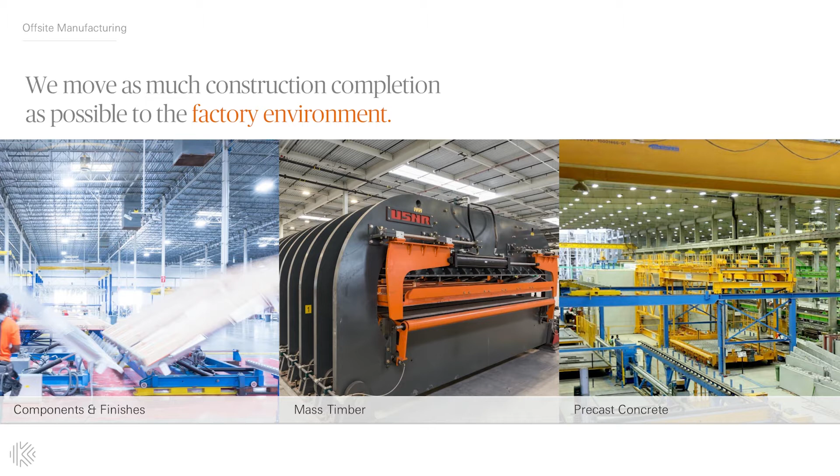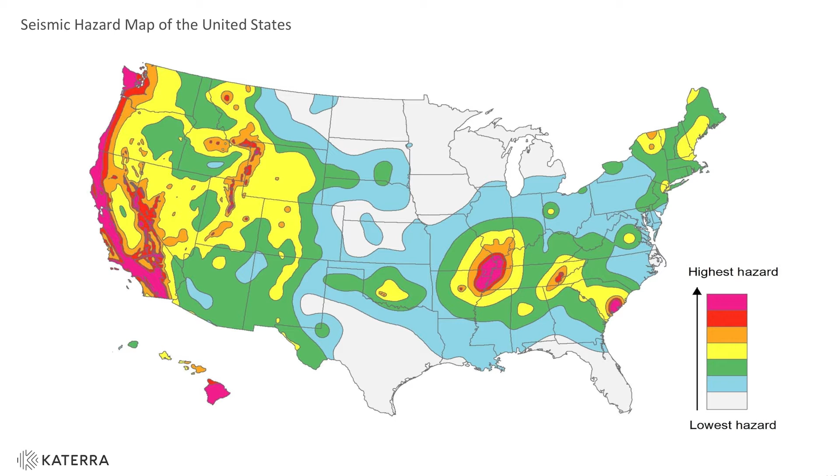For example, here we're looking at a seismic hazard map of the U.S., and using automated design, we actually estimated the cost of the structure in all of these different regions. And due to the different seismic and lateral requirements for that 24-unit, 3-story multifamily housing product that I mentioned briefly earlier, the cost of the structure more than doubles depending on where it's located in the country, due to the different structural requirements.

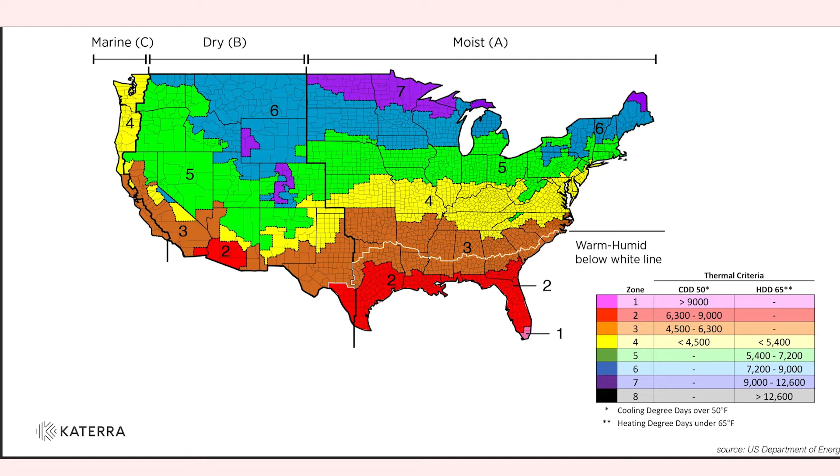We see on the mechanical system side less capital cost variation across the climate zones in the U.S. But if you're looking to optimize for operational or life cycle performance, it's equally important; we have quite significant variations in terms of operational efficiency if we're not able to customize the systems to this locality.

And finally, from a market perspective, these numbers are indicative and not accurate today, but the cost of labor in the United States for site construction is more than a 2x variance depending on where you're located in the country. I'm typically based in the Bay Area, which is one of the most expensive areas for on-site construction.

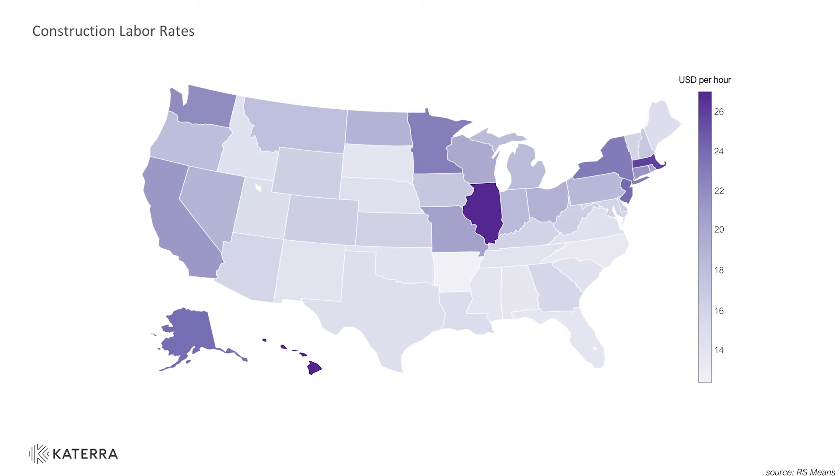And so when you're developing an industrialized solution, you want to vary the level of completion or the amount of work that you do in the factory by region. And so the solution has to be customized to allow you to do more or less work in the factory depending on the local labor economics. So Katerra is approaching that through an automated design approach, which I'll cover briefly.

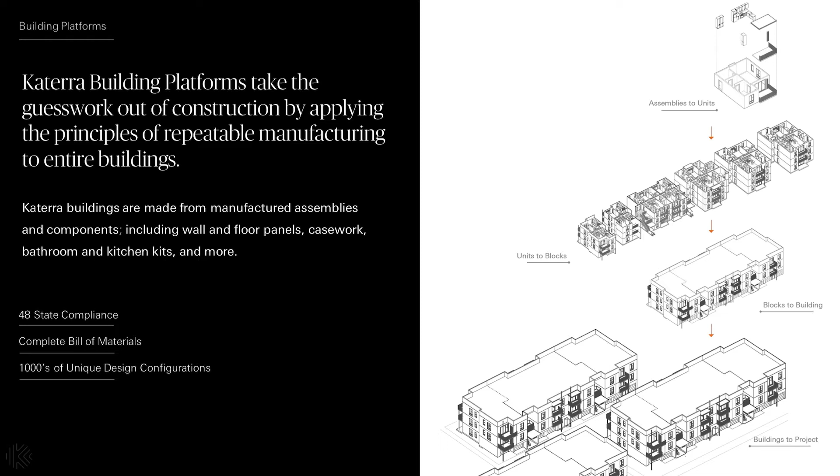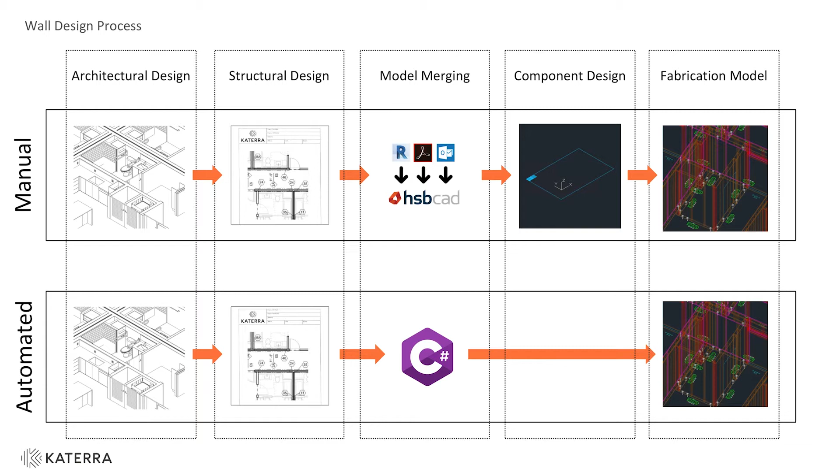So, of course, like many other designers, this is the 24-unit apartment building that I mentioned. We have standardized units that can be combined in different ways. In this case, we have 12 different standard units that are combined into these 3 building blocks of the apartment building that we call chassis, the center core block and right and left ends. And with a relatively small standard number of units, we can achieve many thousands of different variations of the building types to meet different customer criteria using a relatively standard component.

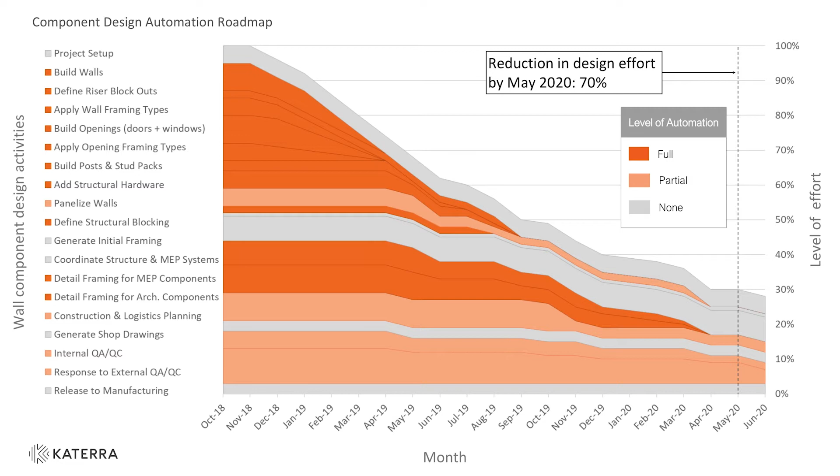We also apply software design automation to reduce effort. So in many cases, fabricators have to remodel a building virtually from scratch to create the fabrication model that drives machines and produces shop drawings. We've developed technology that takes just the design drawings and is able to read metadata out of those drawings to produce a fabrication model as you're seeing.

Due to time, I will just cover briefly that we've looked at plans like this that look at how much effort is spent in different aspects, in this case of creating a fabrication structural model, and which of those tasks can be automated through software. And so to date, we've reduced the effort to about a third of what it was late in 2018 by developing software automation to support the business.

That has created some interesting changes in the skills and experience that we've required on the design side. Before applying the automation, we had a very small number of experts, defined as more than 10 years in the industry. The ideal skill set after applying automation is that we need much more experienced designers as a relative percentage of the total, because most of the basic tasks have been automated.

In terms of young designers entering the industry, we've been recruiting and having a lot of success finding young designers that have software or visual programming skills coming out of university, and so they're often being paired with experienced designers and contributing as the tool builder to help design some of these software tools. So not seeking to replace the designer, but just to enable the designer to focus on higher level, more challenging problems rather than the details of, for example, modeling details or designing pipe routing.

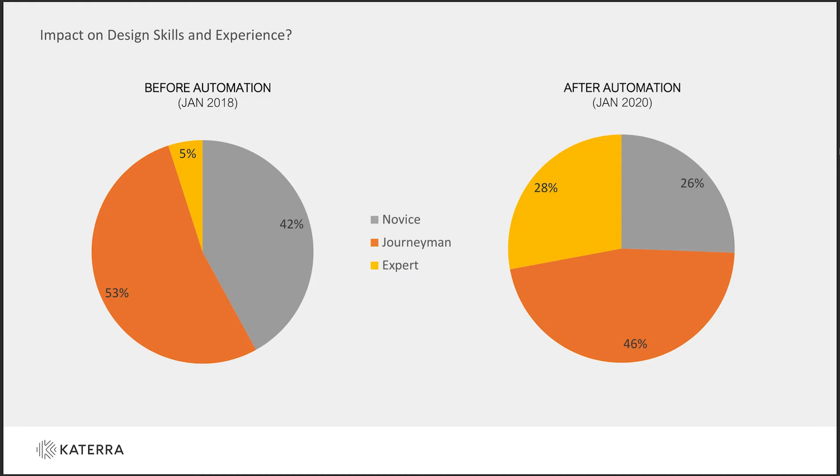So that's one approach, applying some automation to the design to achieve that mass customized solution. What is, I think, most exciting is once we have industrialized construction and a data-rich production environment and automated design, we can get to interesting iteration between the two. So I'll pick a very simple example, which is just a typical wood timber stud wall. Both of these types are roughly structurally equivalent, but given Katerra's factory capabilities, one is about 30% cheaper for Katerra to make.

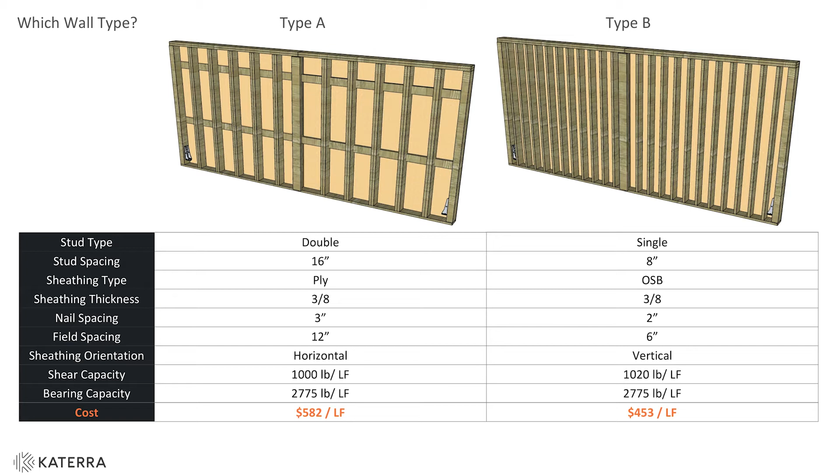So how are designers aware of how to make these types of decisions to come up with the most economical designs? And so this is a trivial example. In some cases, it becomes more complex. The way we do that is we capture data.

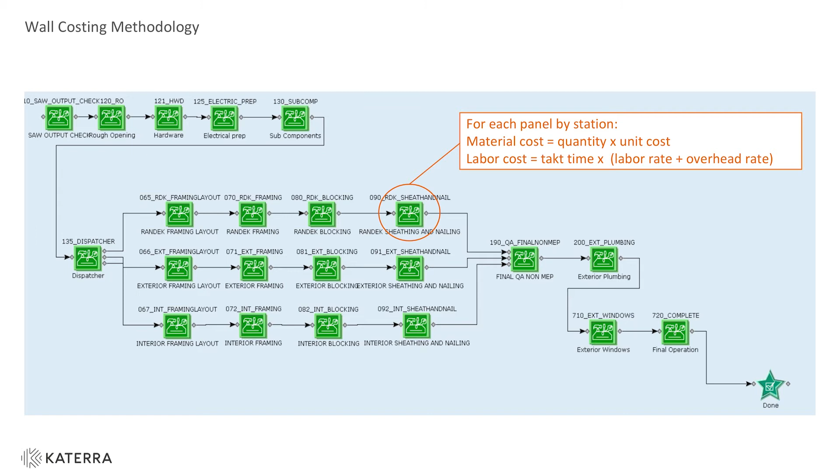And then the system, using real-time information, is suggesting to them the most economical, in this case, stud wall designs that are easiest for the factory to produce at that moment in time, because the factory is also changing capabilities and layouts, at least in our case, on a quarterly basis.

So that enables us overall, in terms of looking at the building cost in general, to look at millions of different design configurations of the building and to try to optimize for cost. So in this case, we're able to reduce the cost of walls by 10% by optimizing to our factory capabilities. So we're working in this area.

This is one example. You could imagine other systems in the building, for example, the mechanical, electrical, and plumbing systems, which have similar challenges in terms of laying out a given system for performance. And just from a technology perspective, I'd like to highlight one other area that we've been active in, which is helping to forecast material demands using virtual construction.

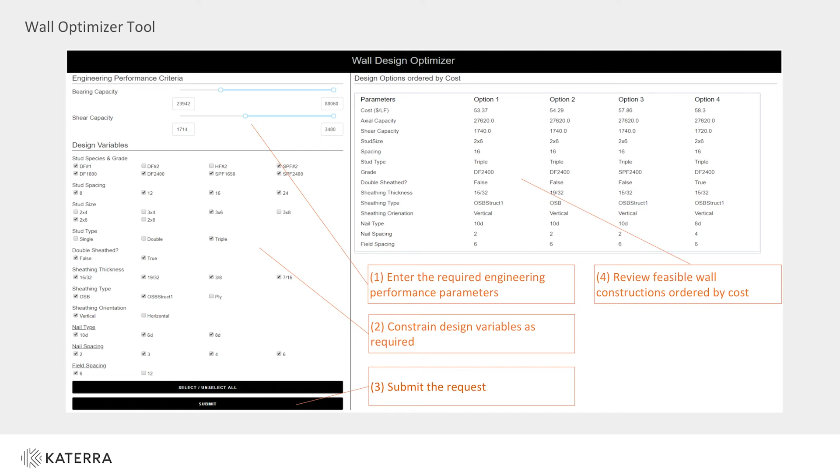So we've developed a process by which, from all of the active design models that we have, we're essentially creating bills of materials and forecasting material demands 12 months in advance. In some cases, we don't have complete design information. For example, the structural design of the building or the mechanical design of the building might not have been completed.

But using historical data, we're able to estimate the designs and material consumptions, which allow us to forecast that material demand. And the reason why that's important is it enables us to buy more often from primary suppliers. For example, we buy from the lumber mill rather than a distributor or a local store.

And it also allows us to negotiate better deals because we understand the volume in which we'll be purchasing over time, which we found typically results in a 5 to 10% material cost savings per category. So if you're able to do this for many categories, you can get significant savings in the overall material cost of the building.

So it's not one thing, I guess, that's trying to enable the Katerra vertical integration, but a lot of little challenges. And because there aren't many companies in the industry that are vertically integrated, we've taken the approach of developing some of our own software and systems to enable us to benefit from that position in the market.